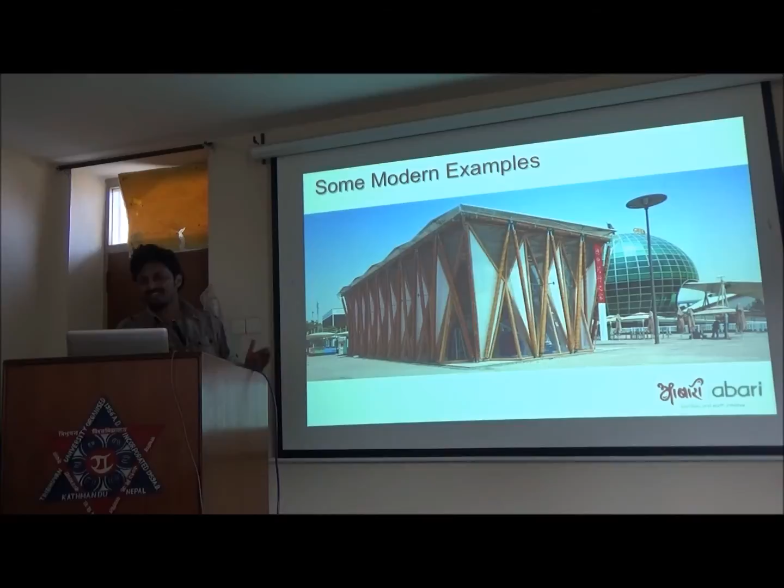It's really interesting because about 200 years ago, all these countries were using steel in the same expo to show that it's modern, that it's really strong. But now all these industrial countries are using bamboo in the expo, saying it's a future material. They believe, and rightly so, that it is the future steel—a natural steel.

So what we did when we started this organization—our basic aim was to find a sustainable solution to concrete and steel, a material that's good for people and for the environment. These were the two very important things.

And we chose bamboo. Why bamboo? Because we have about 54 species of bamboo in Nepal because of our biological diversity and geographic diversity. We have areas as low as 60 meters and as high as Mount Everest, which is 8,800 meters. So we have tropical bamboo, which is found all the way to Thailand, Indonesia, to really alpine bamboo.

It is basically a grass, and it can grow up to 36 inches in a day. So it reaches its full height of, say, 40 feet in just a few weeks. And it's stronger than wood, for sure. Some of the species are even compared to steel. It reaches its full strength between 3 to 5 years. So it's a really interesting plant.

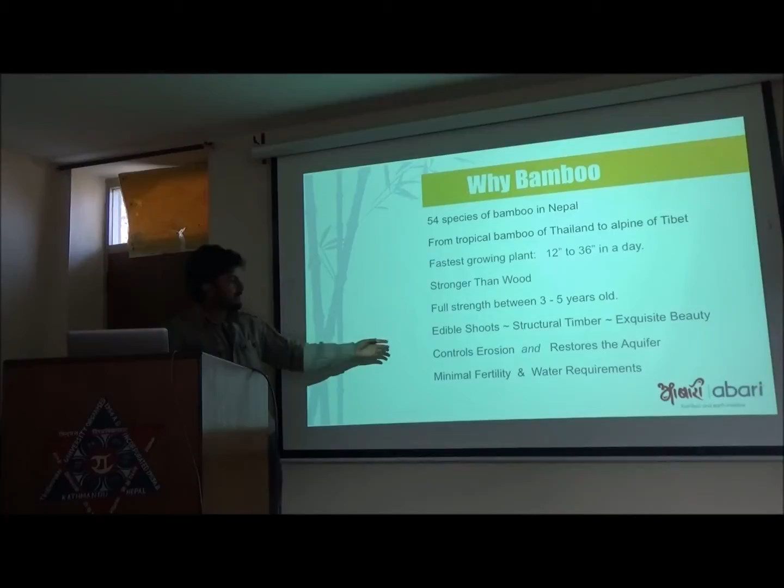And apart from its strength, it controls erosion. It grows in marginal land. There's a famous story in Japan that the first plant that grew after the Hiroshima bombing was bamboo, because it can grow in really harsh conditions and doesn't require much water.

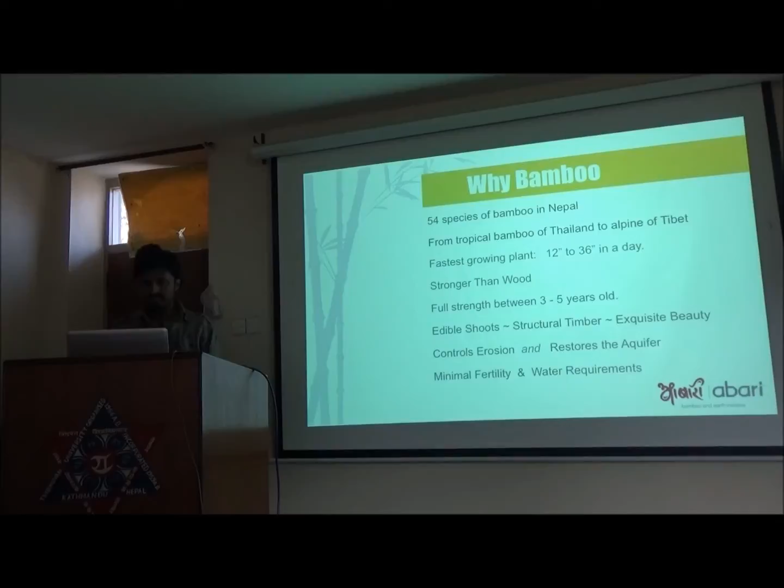So what we do is we're trying to create a whole supply chain of bamboo. We do not want to just use it, because now in Nepal bamboo is only used as temporary material. People only use it to make cow sheds or similar things.

So what we do is we work with farmers. For example, in Chitwan, we piloted this, and we're trying to do it in other places too. We give bamboo seedlings to farmers, and we tell them how to plant them, and they plant this bamboo along riverbanks. When they plant it along riverbanks, the benefit is it controls erosion. And riverbanks are usually marginal land, not very fertile, so it's extra income for them. It's a wasteland anyway, so it also controls erosion. And then we buy that bamboo from them at a fair, predetermined price.

And then sometimes we even train them to do pre-processing of bamboo, for example cutting and making strips. And then we bring it to our workshop in Chitwan, where we treat it so it has long durability. And then we make bamboo furniture, or even bamboo housing elements, make trusses, we make houses, which I'll show.

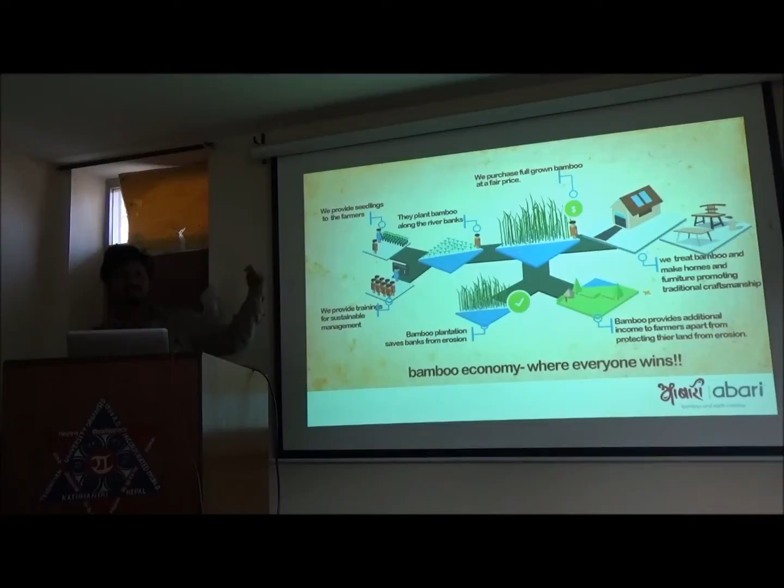So we're trying to create an economy where everyone wins. When you do this, you're reviving old, damaged landscape and then creating a good environment, which is exactly the opposite of what the concrete and steel industry does. It's an extractive industry, whereas this is a regenerative industry.

So we work with farmers, and we do a lot of plantation. Last year we planted about 10,000 bamboo, and we want to do more. And then we document all the traditional skills that are around, and we do research and development, because unfortunately, even though we have so much bamboo, nobody is interested. There's no education system—in university they don't teach bamboo—so we do it ourselves. Once we get to research and development, we design and build, and then we train a lot of people in the process.

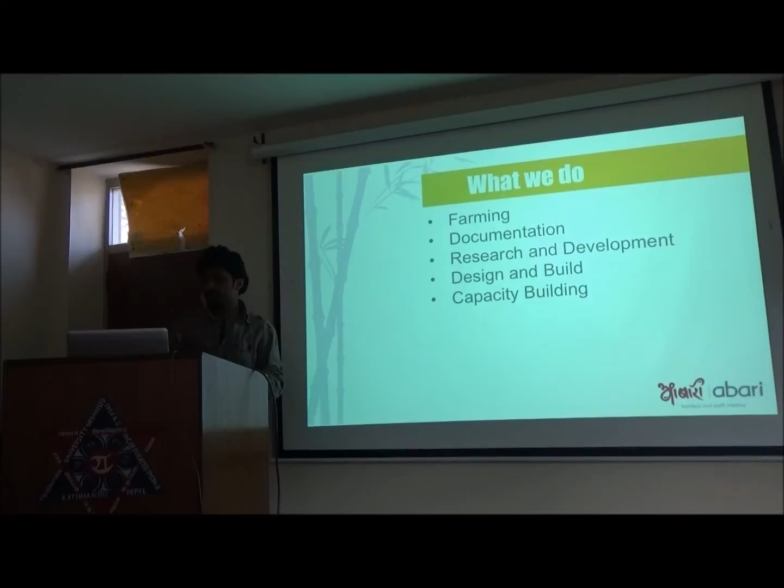And we planted it, and then we used technology to create this mobile application where you can go to the farmer and they'll give you information. They'll tell you their coordinates. With a mobile phone you can have a GPS, and they say, okay, in my farm I have about 50 bamboo culms, of this species, and this age. So we have whole documentation.

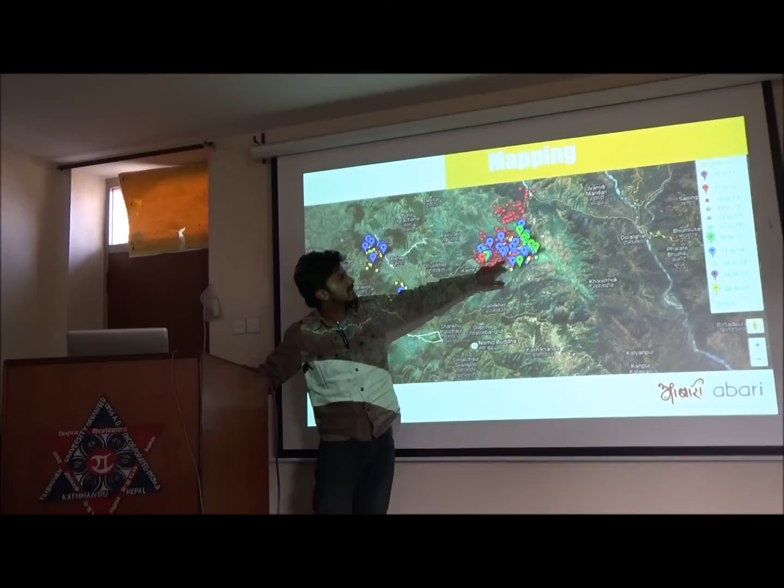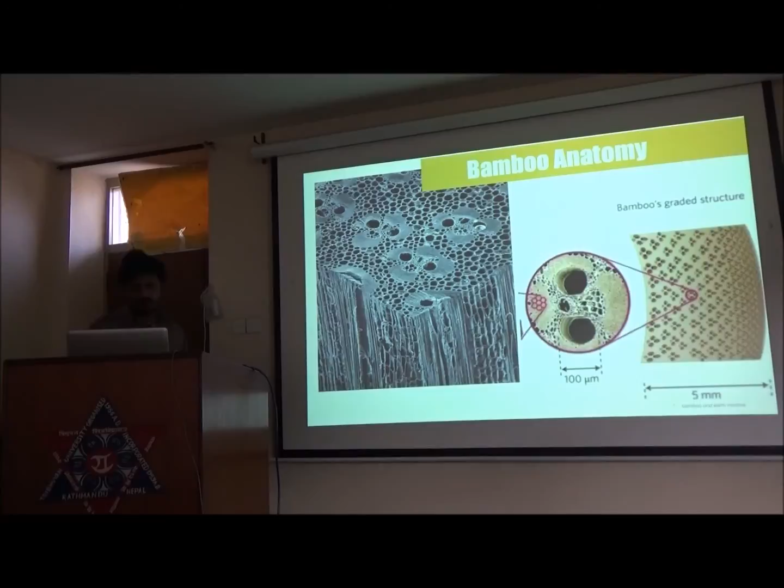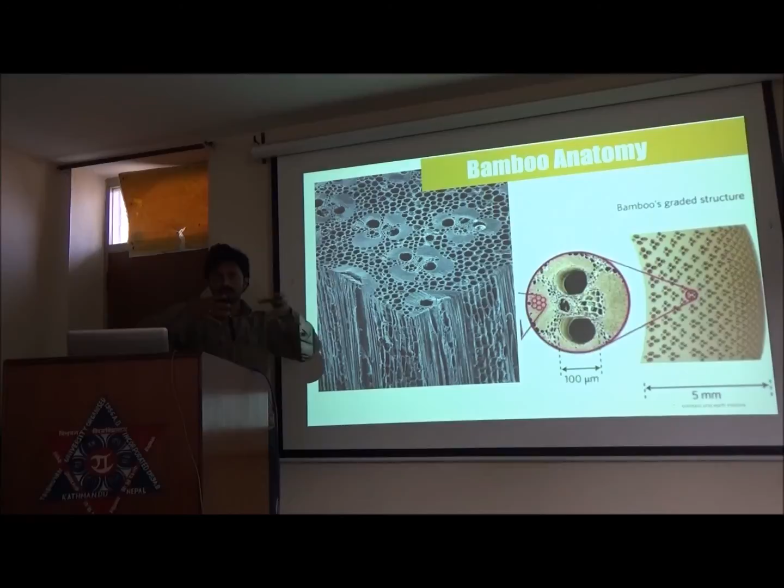To go technically into bamboo - bamboo is like tubes. In modern engineering, tubes are considered the strongest material. But bamboo is like composites of tubes, so they're even stronger - lots of tubes connected, which makes it really strong, flexible and strong. But one problem with bamboo is it has a lot of sugar content, because it needs that sugar to grow fast.

So that's the downside of bamboo - because of all the sugar, it gets attacked by beetles and termites really quickly. When I first started, I was going around seeing all this beautiful bamboo. People know it's very strong and beautiful, but they're not using it, and the reason is durability.

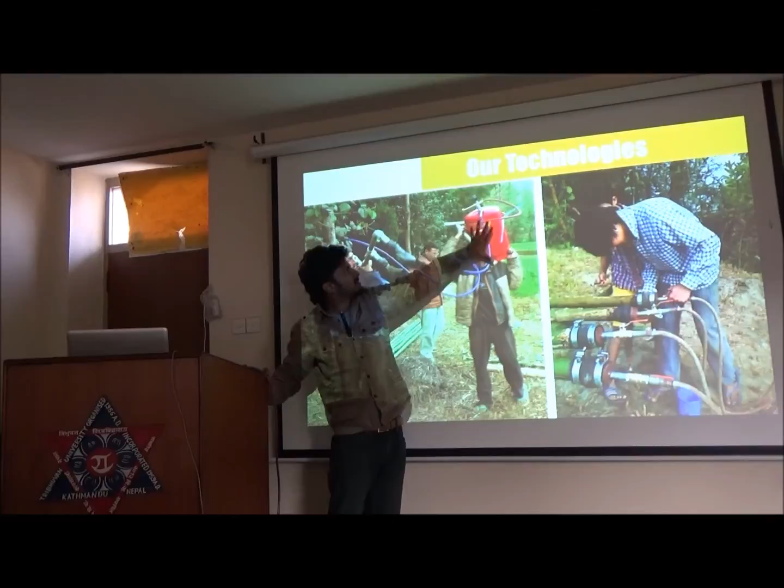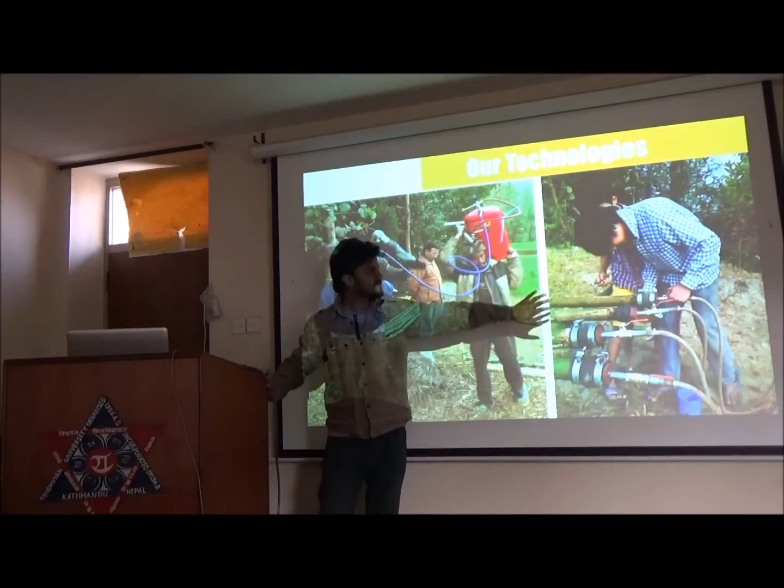So I was looking around, and there's a lot of expensive systems to treat it. I didn't have money, so I created and modified this system where you have a bamboo chamber, a cylinder, connected to tubes, with a distribution on the other side that connects to the ends of the bamboo. Then you put the preservative in here and apply pressure.

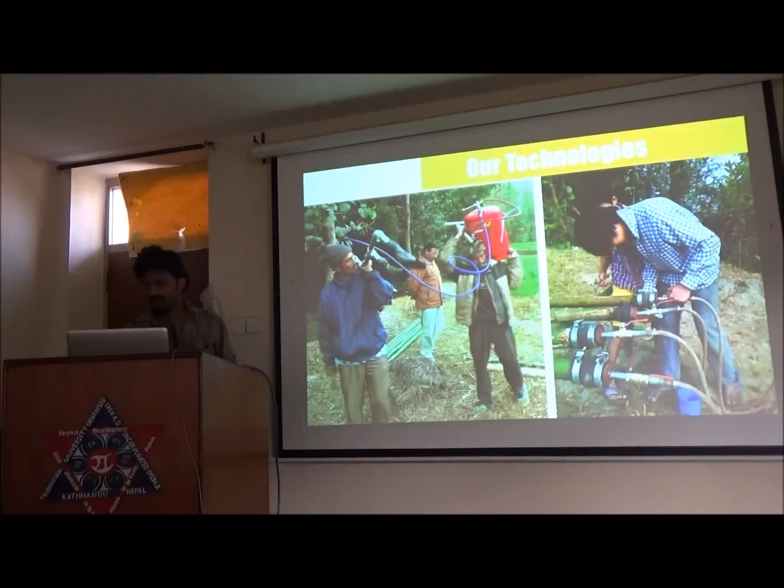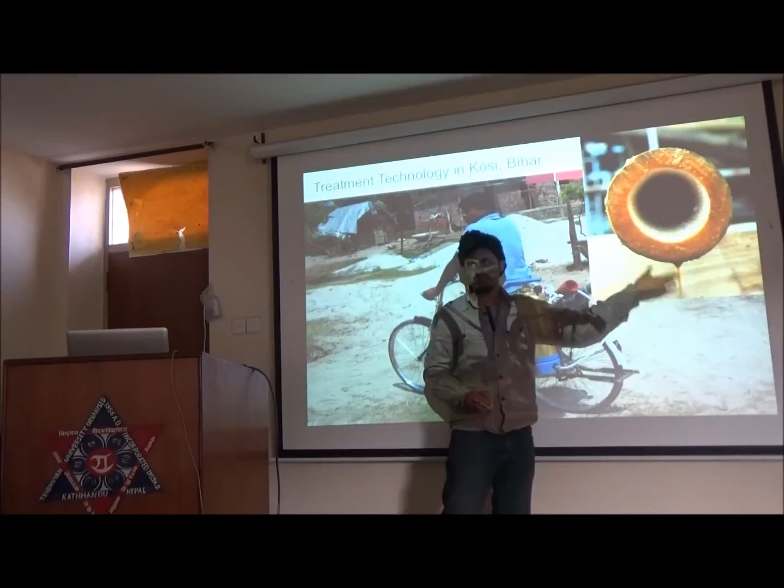You can apply manual pressure, and it pushes the sugar content out of the bamboo in like 5 minutes - it's really effective. If you look at the other side, once you have this pressure pushing, the sugar starts to come out from the other end. You can see it's all the sugar. After about an hour of treatment, the sugar turns bitter because it's replaced by the preservative, and it works.

We exported our technology to Bhutan, and now they have our treatment machine in every community forest. Another success example was in Kosi, Bihar - there was a big flood, so we supplied these machines. This guy on a bicycle goes around to villages, treats bamboo, and charges 5 rupees for treatment. It's created a really good social enterprise.

This system works well, but the only drawback is the bamboo has to be green when you do this. That's not always possible, because by the time you take it out, it also has to be within 12 hours - so by the time you bring the bamboo to your farm, it's already dry and you cannot use this technique.

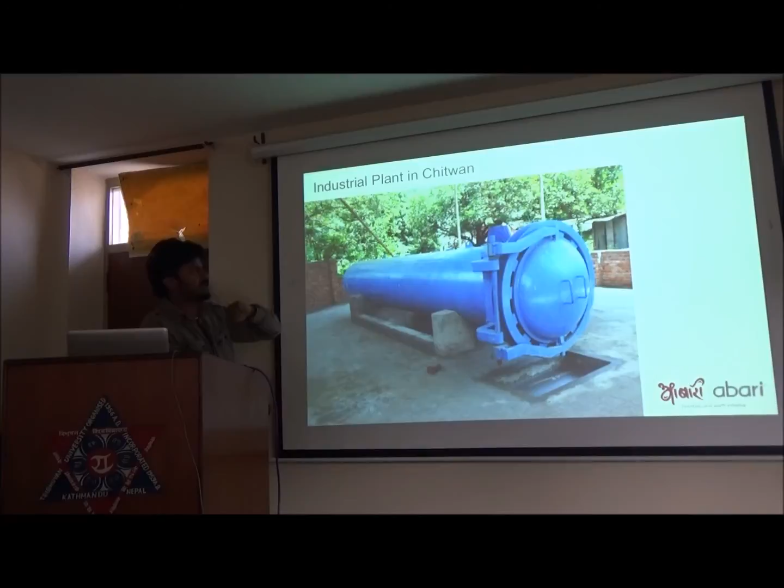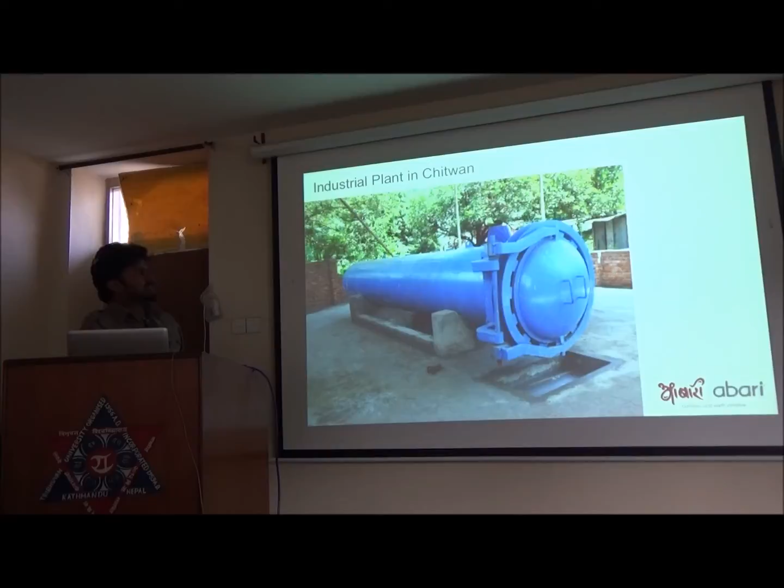So we also have a system like a regular pressure chamber - this is in Chitwan, where you put all the bamboo, apply pressure, and put the preservative in it, and it works - it's very effective. This is a standard machine used in the wood industry, which we use here.

Now the major problem was the durability of bamboo, which is taken care of. The other problem is strength. If you want to work with engineers, they always ask what's the number, right? And since bamboo is a very heterogeneous material - some are tapered, some are smaller, some are bigger - it's kind of hard to do tests because they'll all come out with different results.

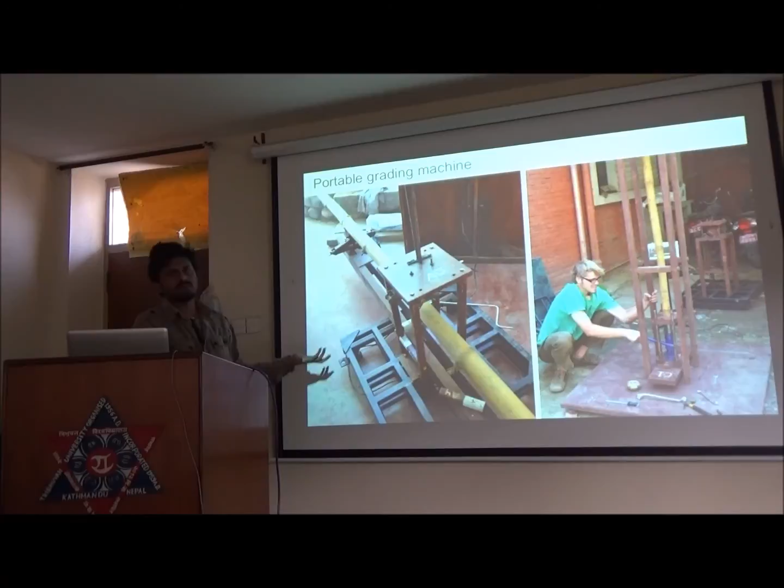So we created this non-destructive testing system where you apply load, and if it bends up to a certain point, it's okay, and if it goes beyond that, we don't use it, or we use it for something else. So it's a work in progress - we created the system, but haven't actually been using it yet.

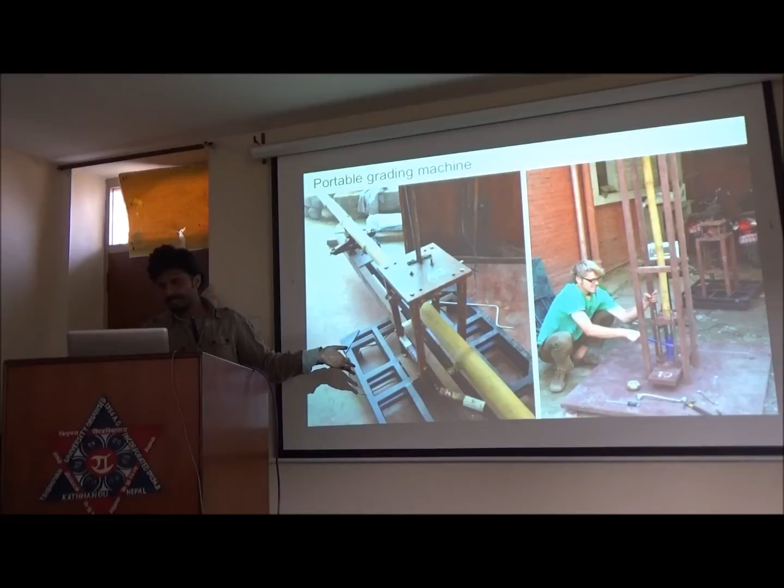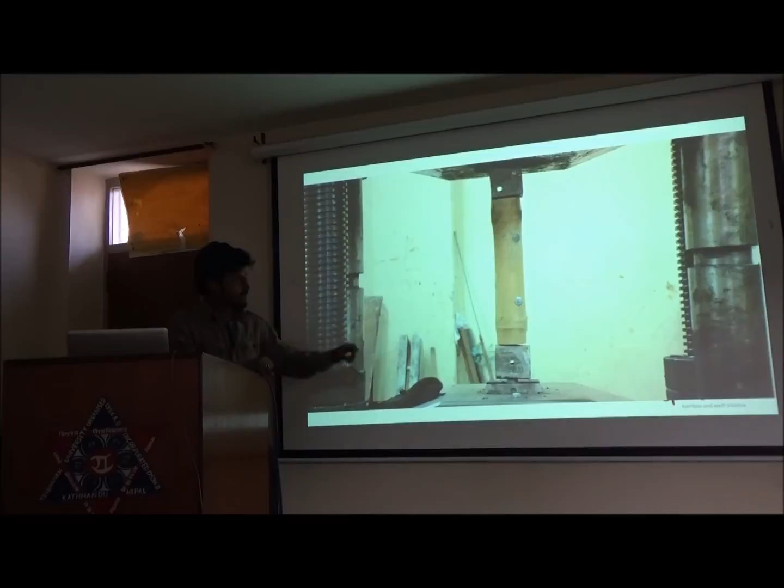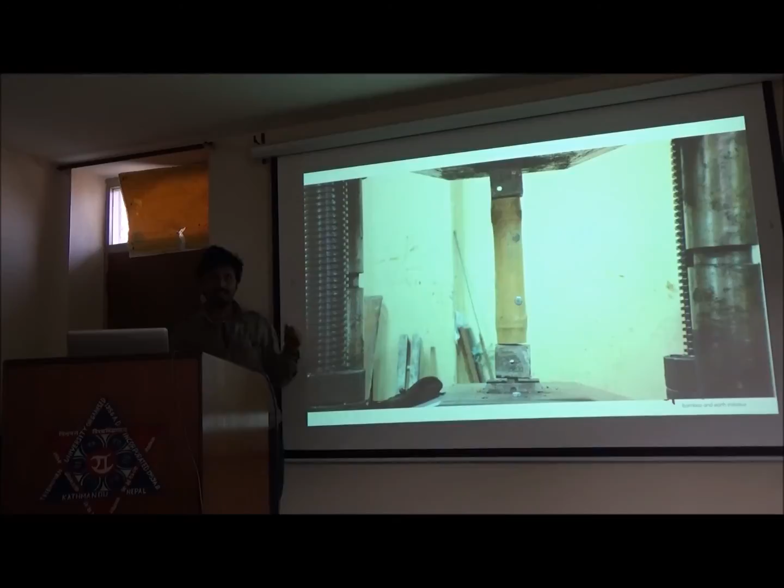We also created this joint system to combine one bamboo with the other, using a metal bracket. We tested it at IOE in the same university, and the results were really impressive. In many of our tests, the steel failed before the bamboo failed—it's so strong. The maximum load it could take was about 3.5 tons, which is more than what you need.

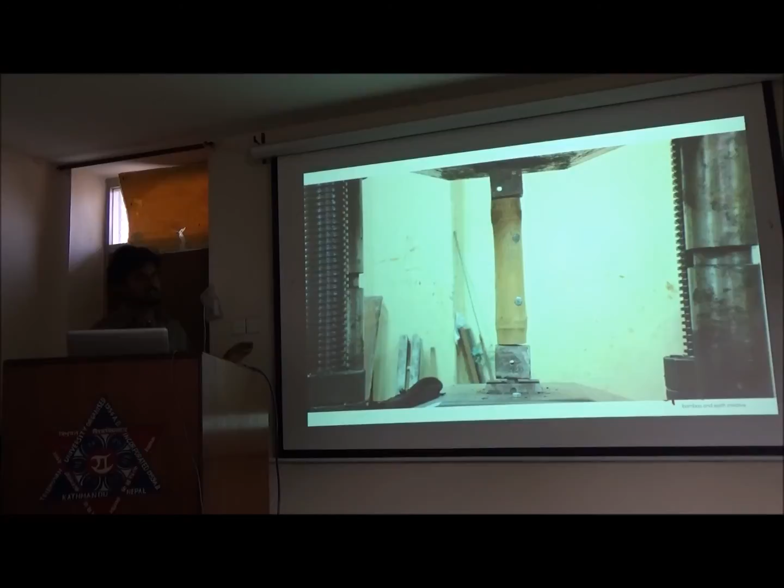We also work with different connection systems. Some use steel for more critical hard structures, or for lighter structures. We use cane, and we even use epoxy for furniture. When we do bicycles, we use cane. There's an experiment we did where we even bent bamboo—instead of making joints, we thought we could bend it while it's growing. So we did this, and it's kind of successful.

Now we're working with Kathmandu University to make an actual earth and bamboo material testing lab, where engineering students come and do all the tests. We want to inspire young engineers and architects to work with this material, so they know more, and so we get more data that can help in promotion of the material. We're going more institutionally on this, but in Nepal there's a big gap between village level and the academics, the engineers, and artisans.

So instead of relying too much on engineers, what I've done is put a small machine, like a UTM, to do simple tests like compression tests, onsite. The workers can go there and see if the joint is good or not. They use this machine and they'll know, okay, it can take up to this load. I mean, they cannot interpret the data fully, but at least they know how much load it will take before it fails. We also use this when we make bricks, so they can test it themselves. Our idea is to make technology more accessible to people.

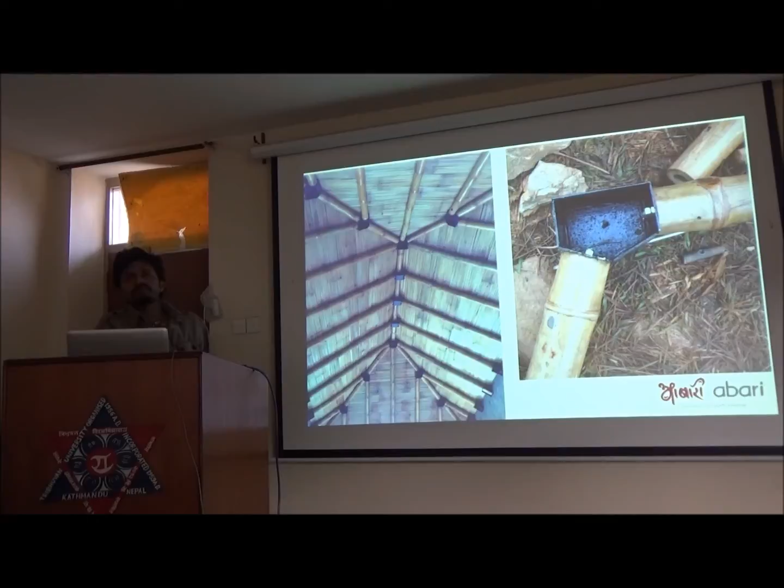So we've created these joint systems, and we're building homes. We use bamboo mostly for roofs, because with a cold or hot climate in Nepal, we need thermal mass. People prefer thermal mass, and it's very hard to make that leap immediately from other materials to bamboo. But the roofs are a relatively easy sell—people accept this better because it's not a critical structure, or I mean, it is critical, but it's not something they touch every day. And it looks really nice, and it's lightweight. It has all the benefits.

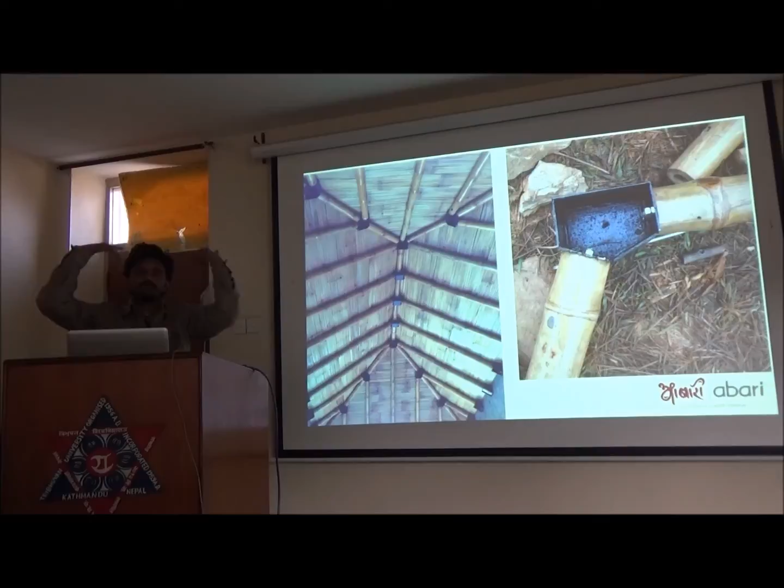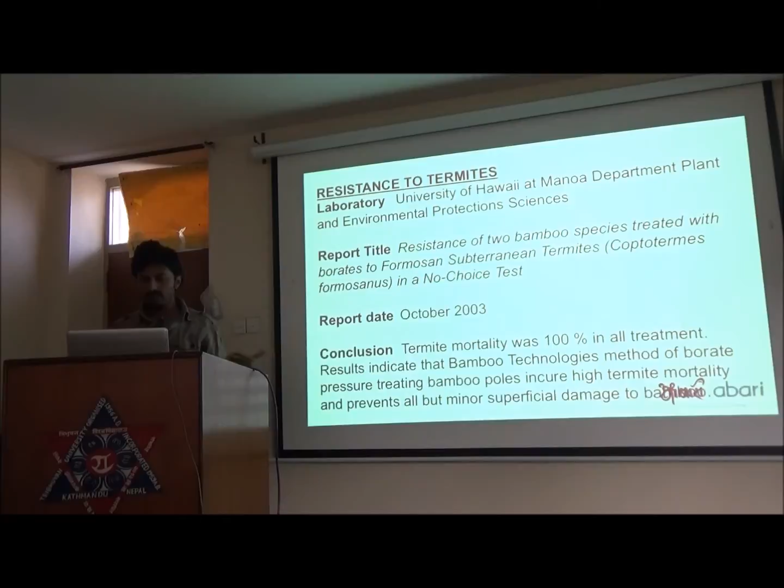Before the earthquake, even if there was a concrete house, we'd have a bamboo truss. This is the test results in terms of how it behaves.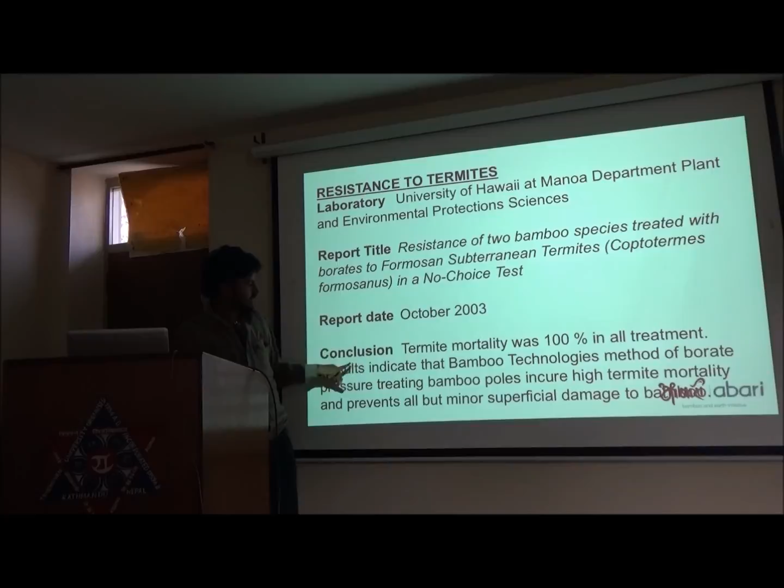We use boron treatment for our bamboo. This is data from the University of Hawaii, and the conclusion was that termite mortality was 100% using this technique—it's really impressive. For fire, it took twice as long to ignite, created only 40% smoke, and burned one-third as much. It's more like it chars rather than burns.

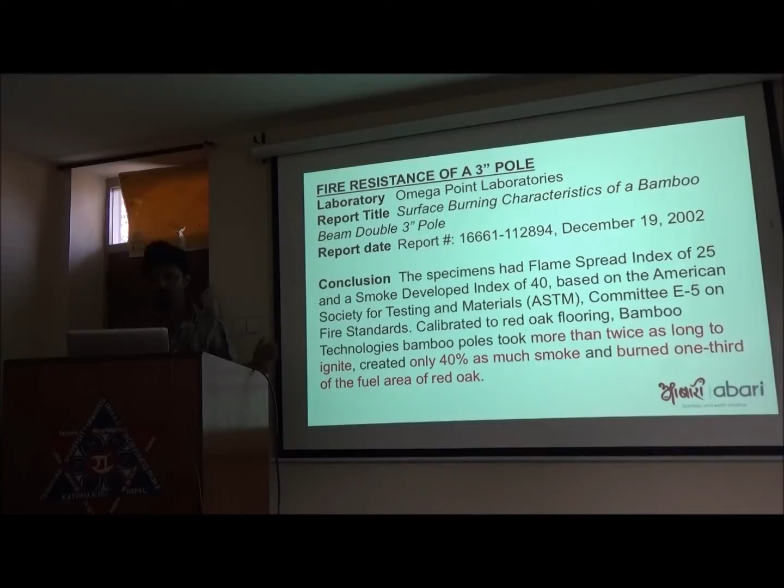So we've been using it for roofs. The walls could be anything—stone wall, earthen wall, even concrete wall—and we use it for schools. My goal was to use it in public schools, because in Nepal the public schools are really uninspiring and boring. They're made with metal truss, CGI sheet, and concrete blocks. It's dark, it's hot or too cold, and it's not a good place to study.

So we created this structure, like this. It was before the earthquake, and this structure was built in Gorkha, about 12 kilometers from the epicenter. It uses stone, with bamboo bands and roof, clay tiles, and stone tiles—everything locally available. This survived the earthquake. Everything around for hundreds of kilometers in that area collapsed, but this building survived.

So it was like a vindication of our technology. We felt, and after that we've been really promoting this. Before the earthquake, there was a lot of resistance to this material, but now, after this and a few other structures in urban areas that we built, the confidence has grown.

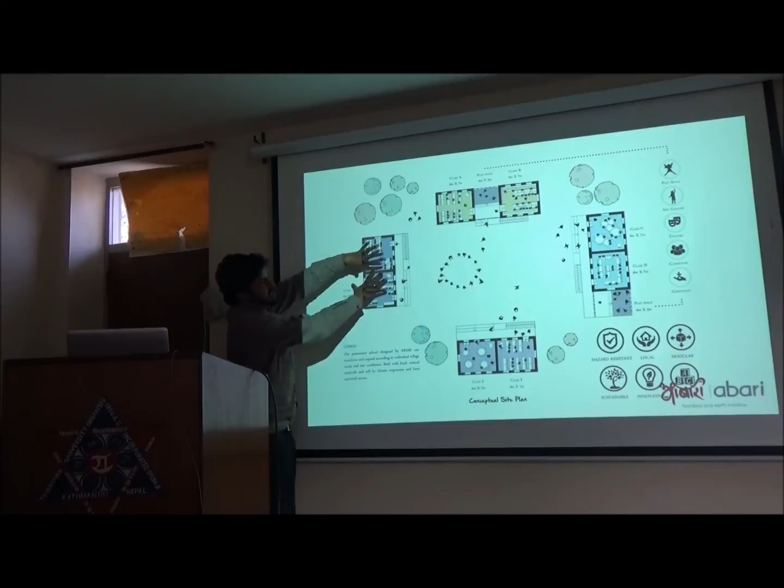Our idea was to take the similar typology of a government school, not changing too much in it, but using locally available material. The basic idea was to have two classrooms, separated so it becomes multi-space, multi-function.

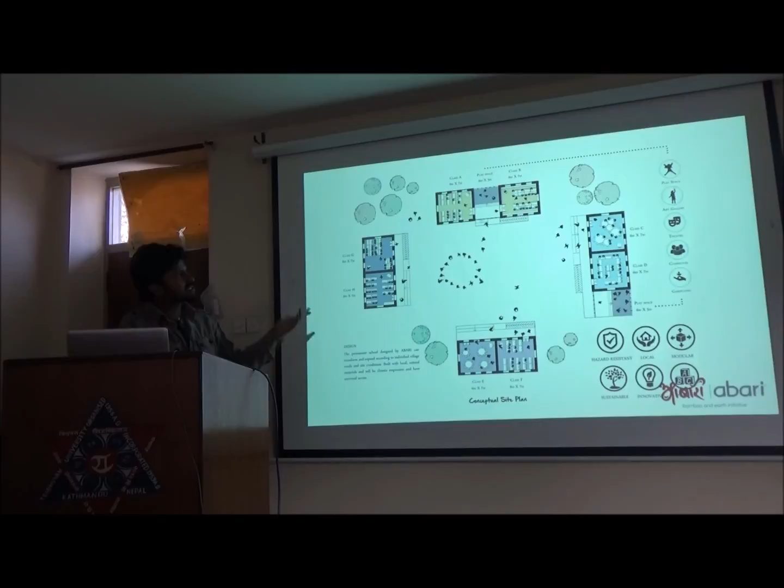In Nepal, people don't have shaded areas when it gets too hot - either you have to be in the classroom, which is dark. So we tried to create a nice play space, and then classrooms, which we are building at this moment. We are very aware of how it heats up and how it cools.

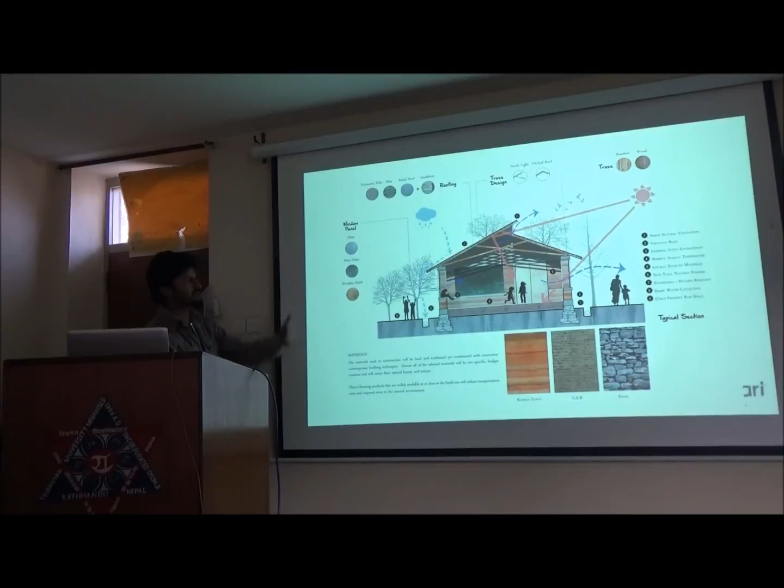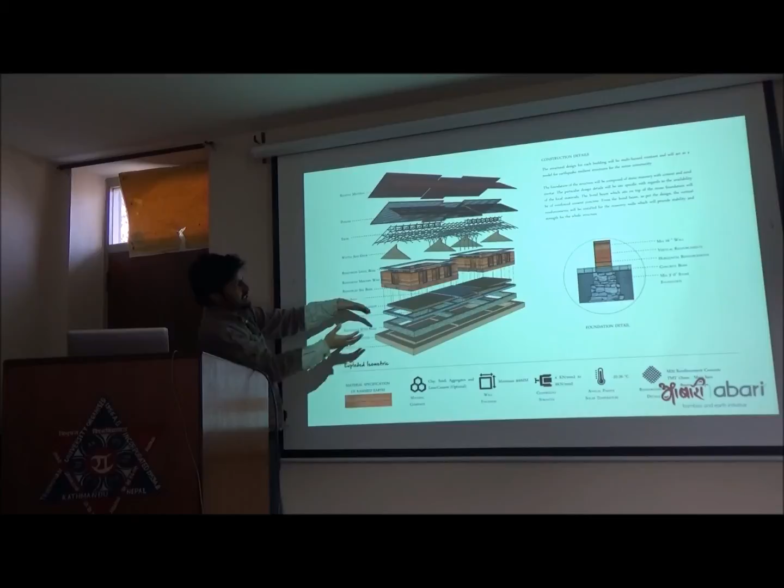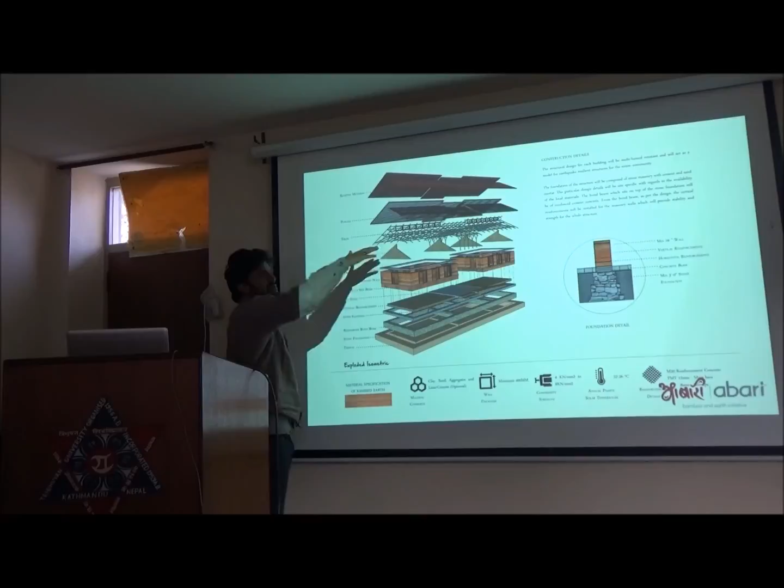So this is a thermal diagram, trying to be very conscientious of heat. If you take the school and separate it, the top part is bamboo, and the truss roof part - because, as I said earlier, you want something light on your head for earthquake reasons. Then earthen walls for thermal mass.

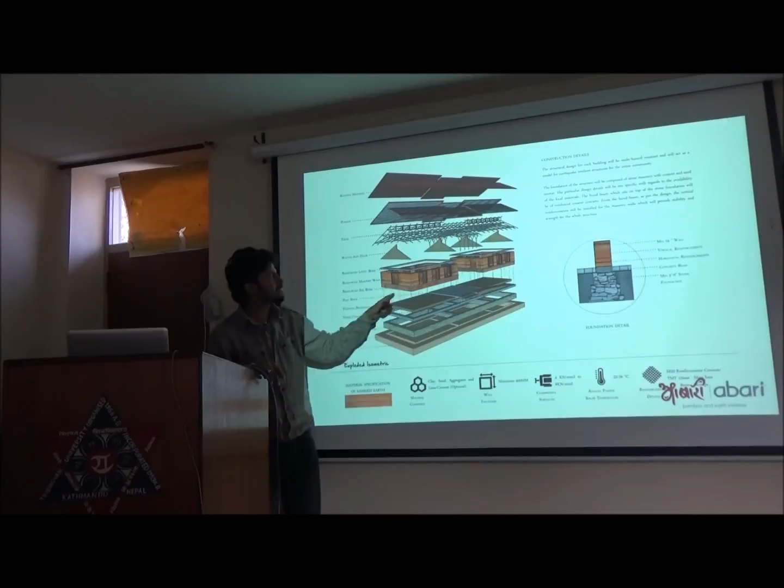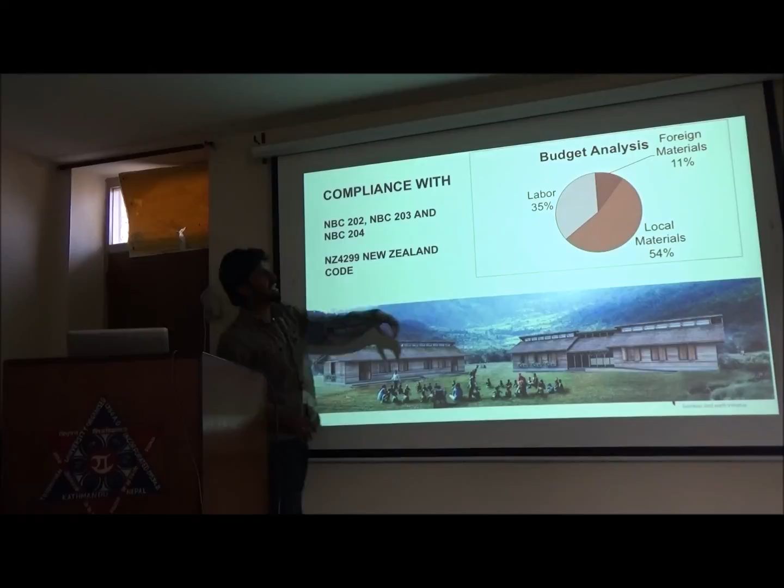And then we have a regular concrete foundation, with beams at regular intervals for earthquake safety. The best part of this is, whatever the labor cost or overall cost, only 11% of the building cost goes into foreign materials like cement and concrete. Most of the cost is in local materials and labor, which I think is good because the money stays in the community.

So that's about it. Here's some references we used - you can look up all these codes. We borrowed things from the New Zealand code and from Nepal building codes.

So we're trying to create an economy, an industry. The current industry gives out a lot of carbon dioxide, but the future industry of bamboo takes in carbon dioxide and gives you oxygen.